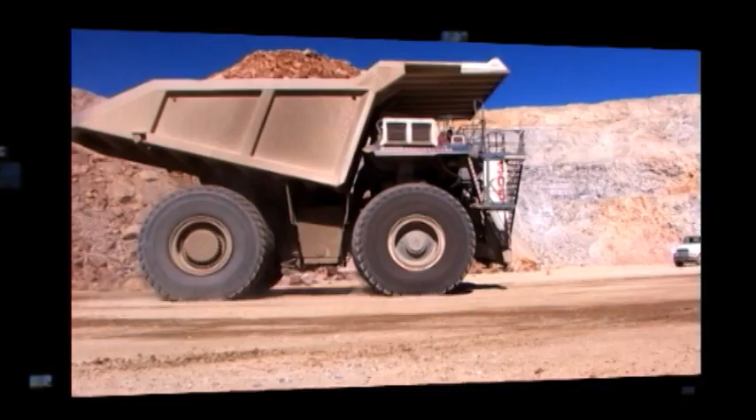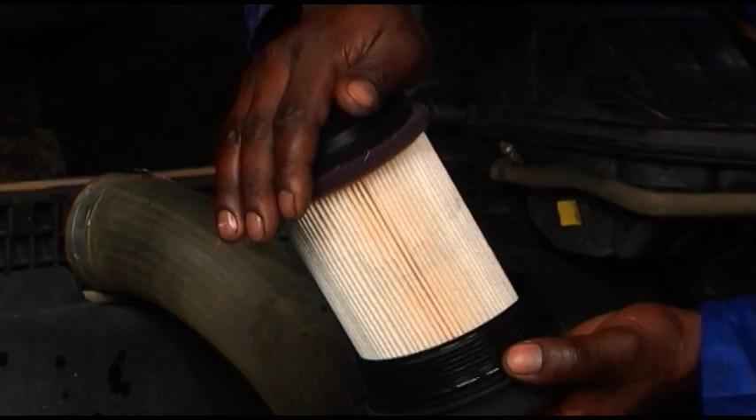Even in challenging work environments, consistent and reliable fuel system performance is possible. The key is good service practices. Before we look at the Donaldson Company's step-by-step fuel filtration service guidelines, here are the pictograms which are printed on Donaldson fuel filters. Do not use tools.

Remember that tools can dent filter housings. Also, do not use spin-on filters with dented housings. Clean the filter base. Lubricate the gasket. Hand tighten. Fill with fuel, remembering to fill the fuel filter with clean fuel on the dirty side of the filter. Don't make the mistake of pouring dirty fuel down the filter center tube.

Complete filter tightening to the number of turns designated on the filter icons. Open fuel filter water separator valve, drain, and close. This one indicates a twist and drain fuel filter water separator. These recycling pictograms indicate the importance of proper disposal. Follow your regional guidelines or laws regulating disposal of filters.

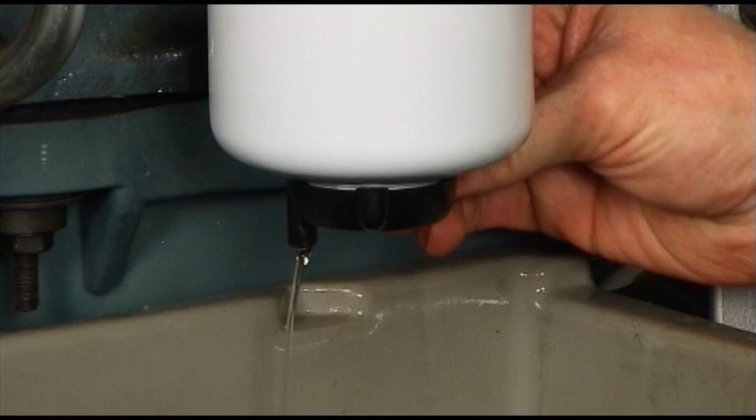When changing fuel filters, use a clean cloth. To avoid fuel contamination, make sure the fuel to be used during filter installation is clean and that it has been stored in a container protected with a cap or lid. Before installation, if it's a fuel filter water separator with drain, drain the old filter. Unscrew and remove the old filter.

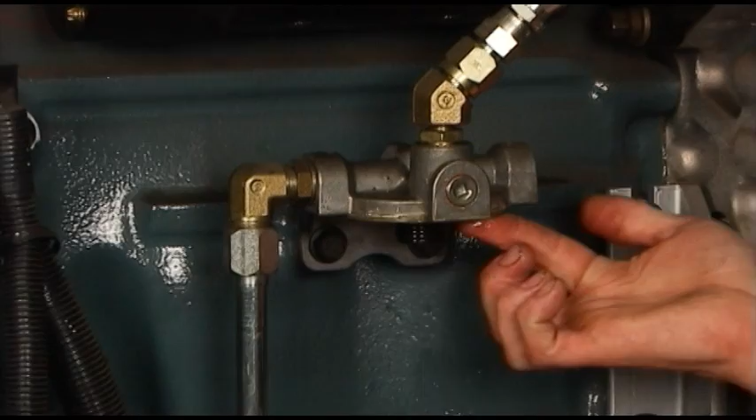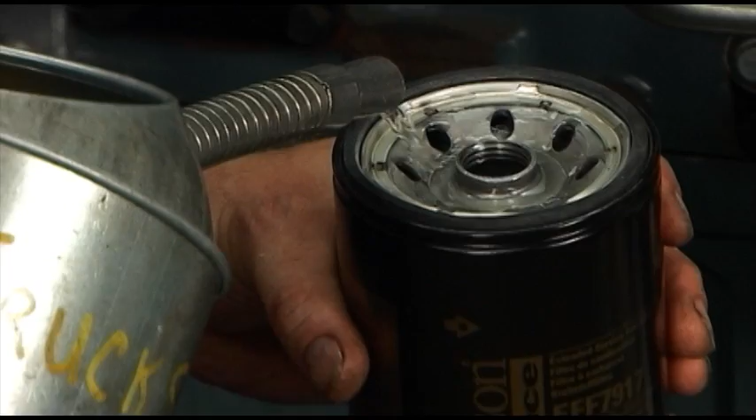Remove the old filter gasket if still attached to the base. Remove the old thread seal gasket if one is present. Wipe the filter mounting base or head with a clean cloth. To install a new spin-on, ensure that the new filter is not damaged. Then follow these steps. If the manufacturer recommends, fill the new filter with clean fuel on the dirty side of the filter. Apply a thin film of clean motor oil to the new filter gasket.

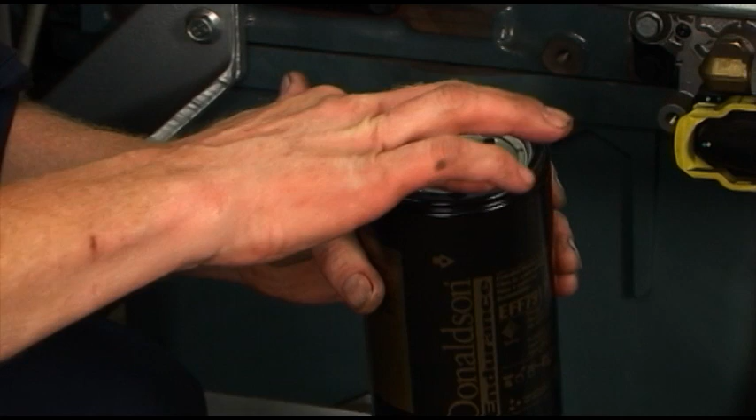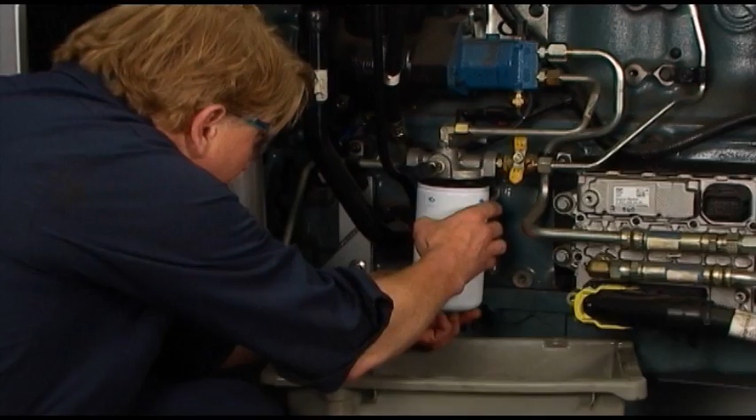Do not use grease. Also be sure never to use fuel to lubricate the gasket. Fuel isn't as lubricating as oil. Install a new thread seal if your system requires one. Align the filter threads to the mounting base or head and spin the new filter on until the gasket contacts the base. Follow the instructions on the filter pictogram for final tightening torque specification. Do not use a filter wrench to tighten.

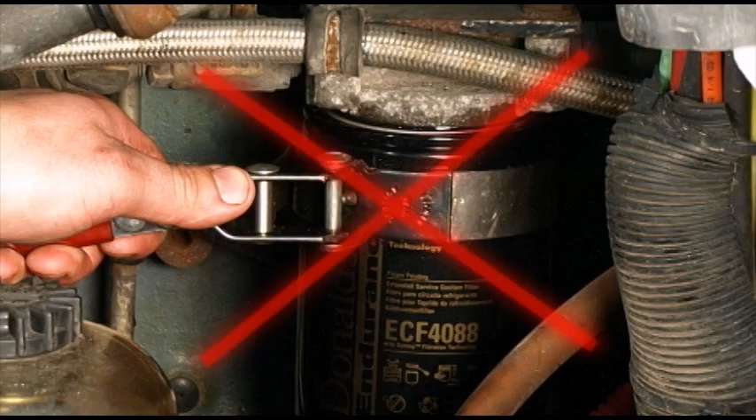Hand tighten only. Prime the fuel system by following the system priming instructions to remove all air from the fuel system. This is to minimize the starting time required after the filter change. After installation, start the engine and check for leaks, and correct the source of leaks if any are observed. In assemblies with bowls, make sure you replace the bowl gasket too.

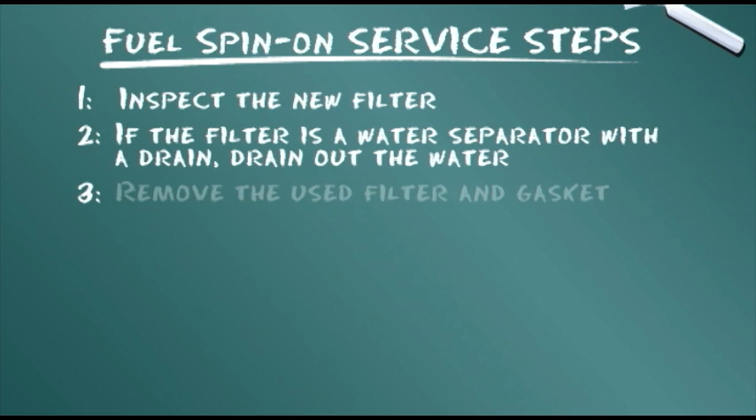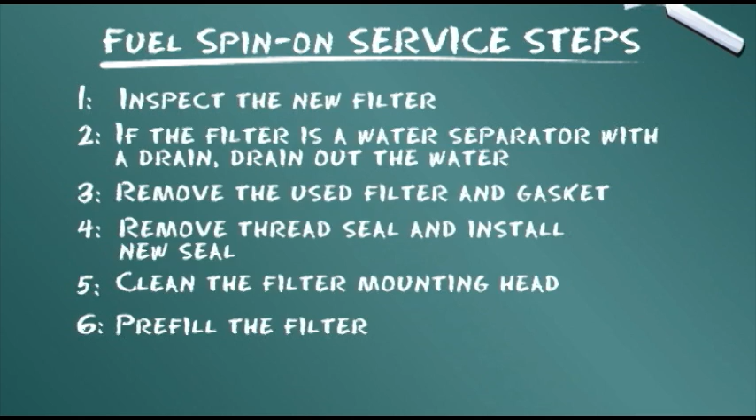Let's summarize the service steps presented. Inspect the new filter. If the filter is a water separator with a drain, drain out the water. Remove the used filter and gasket. Remove thread seal and install new seal. Clean the filter mounting head. Pre-fill the filter. Lubricate the filter gasket.

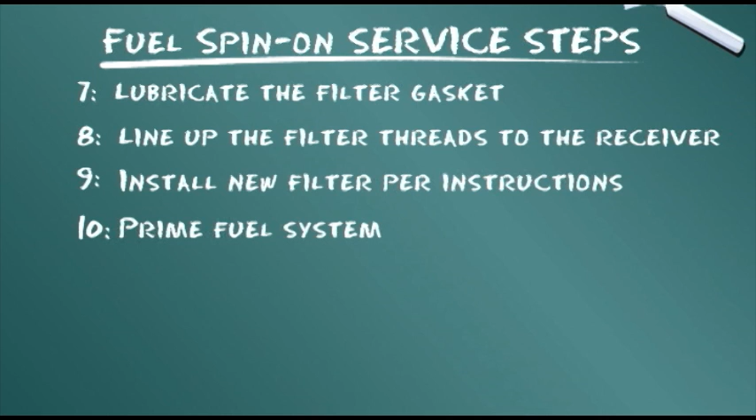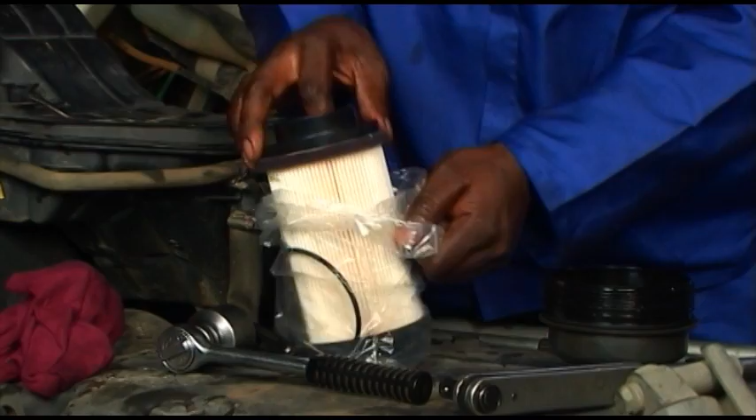Line up the filter threads to the receiver. Install new filter per instructions. Prime fuel system. Start engine and check for leaks. For filters with bowls, ensure that you replace the bowl gasket as well. Now we turn to cartridge filter change-out steps. There are several types of cartridge filters and housings.

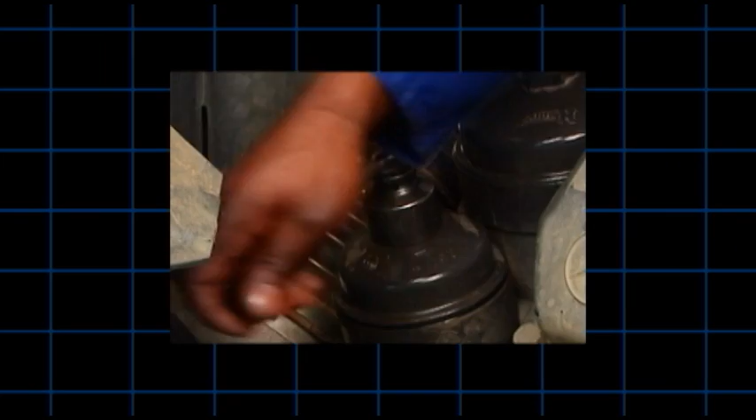First, for metal-free cartridge filter change-out, follow these steps. Loosen the cap slowly. By starting to unscrew the cap, a valve will open and allow the fuel to flow out of the housing. Then remove the cap and cartridge or element assembly. Remove the gasket from the base if one is present. The cartridge should be attached to the cap when it is removed. Unsnap the cartridge from the cap and dispose in accordance with local disposal guidelines.

Remove the old O-ring from the cap. Clean the cap and housing with a clean cloth. To install, fit the new gasket or O-ring in the cap. Place the new filter cartridge into the cap and install a new gasket on the base if one is required. Reinstall the cap with the filter cartridge and tighten the cap to proper torque per cap instructions if present, or

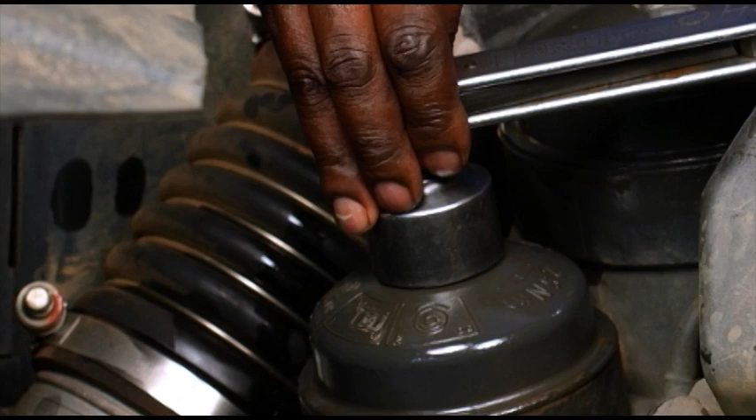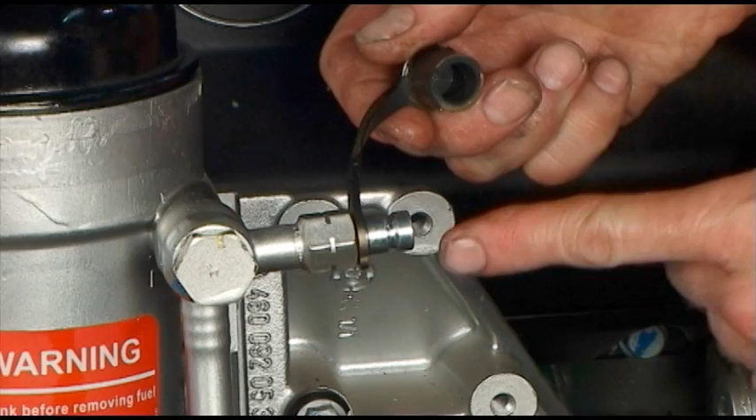follow manufacturer's guidelines. Prime the fuel system by following system priming instructions to remove all air from the fuel system. This will minimize starting time required after the filter change. After installation, start the engine and check for leaks.

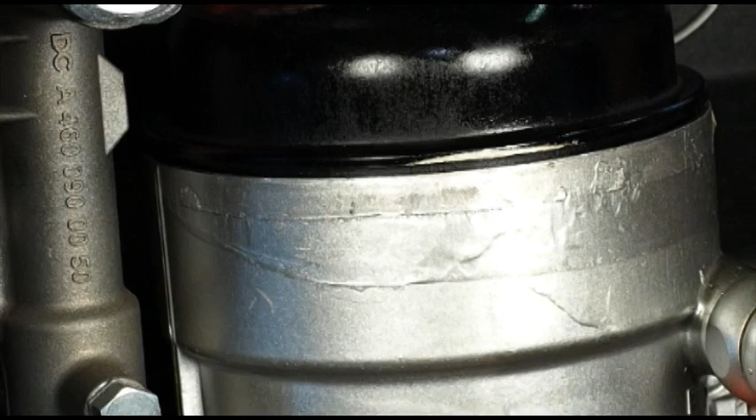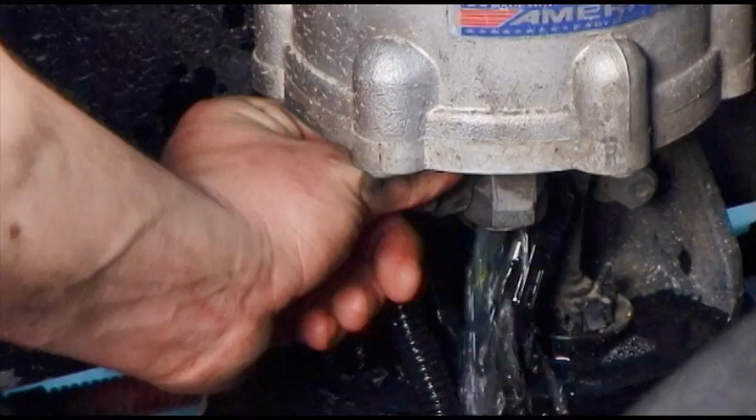For Davco-type cartridge filters, follow these steps. Remove the vent cap and open the drain valve to drain the fuel below the collar level. Remove the cover and collar.

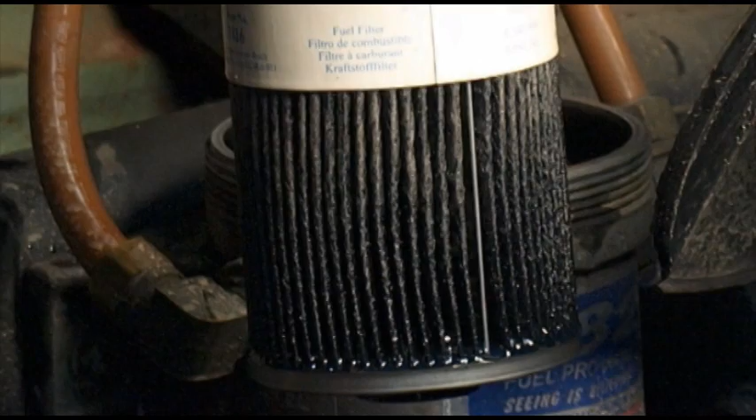Remove the filter cartridge, cover seal, and vent cap seal and dispose of them properly. If the grommet from the base of the cartridge has detached itself and remains behind on the stud, remove and dispose of it. Using a clean rag, clean the cover, the collar, and threads on the fuel processor body.

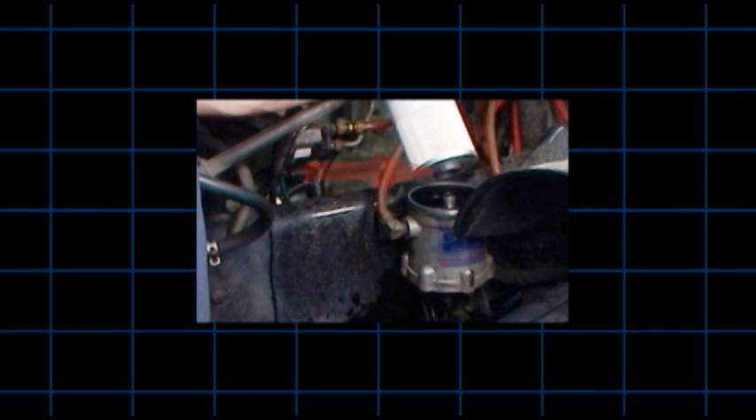Check to verify that the grommet is in place on the bottom of the filter cartridge and install the new cartridge. Install the cover seal, then install the cover and collar. Hand tighten the collar. Fill the cover with fuel. Fit the new vent cap seal onto the vent cap and hand tighten the vent cap in place.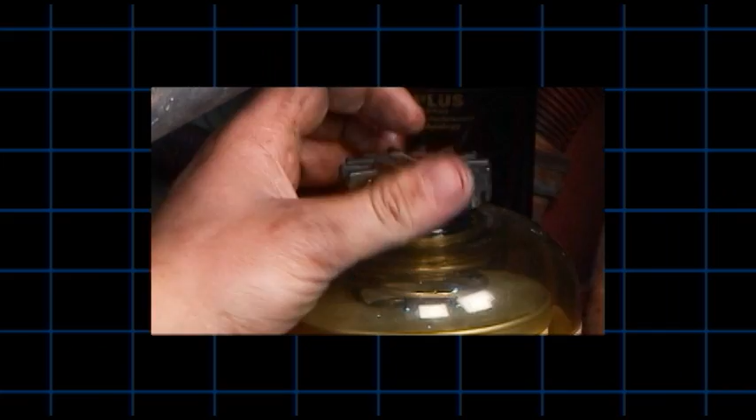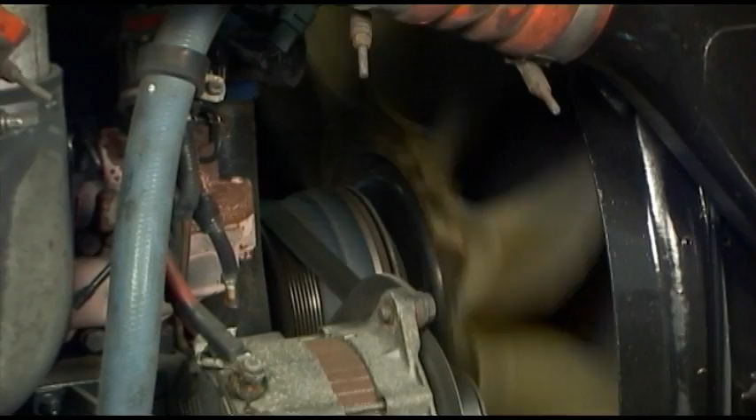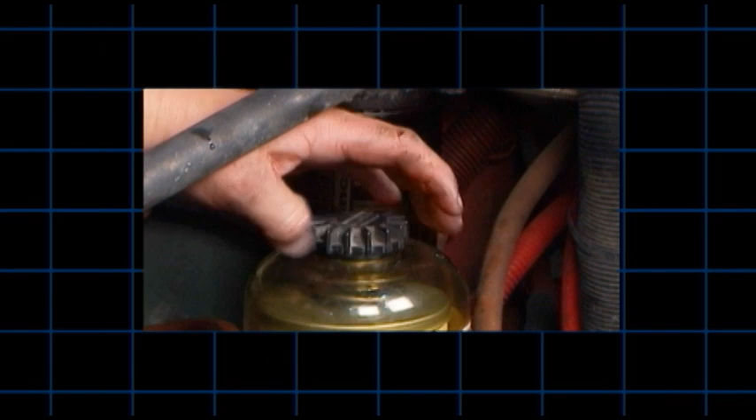Start the engine. When the lubrication system reaches normal operating pressure, increase the engine RPM for 1 minute. Slowly open the vent cap until the fuel level reaches 1 inch or 25 millimeters above the collar. As a final step, hand tighten the vent cap.

Let's summarize the service steps presented. Drain fuel, water, and dirt from the canister and close the drain. Loosen the cap slowly. Remove the used filter and gasket. Clean the housing seal area and cap. Install and lubricate O-rings, gaskets, and housing seals. Install new filter per instructions. Prime fuel system. Start engine and check for leaks.

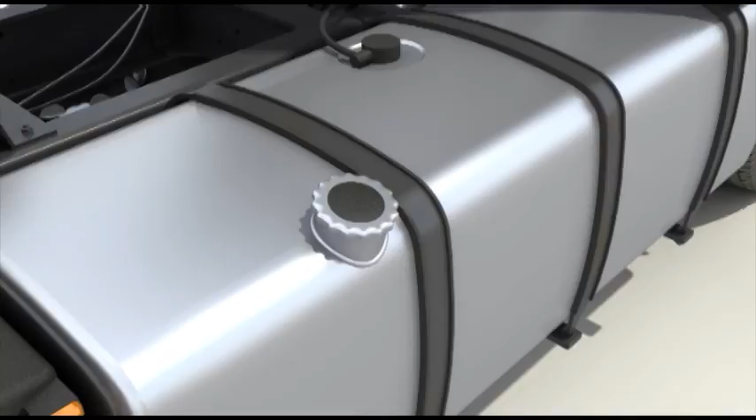Now, here are a few fuel system tips. What advice is there for avoiding engine performance problems related to impurities in fuel? Drain water from your primary filter daily when refueling. Carry a spare set of fuel filters in case you receive a bad load of fuel.

Remember that if the filter becomes clogged, it's doing its job in catching harmful contaminants that could lead to more expensive repairs. Never switch to less effective filters to get longer filter life. This will reduce fuel pump and injector life.

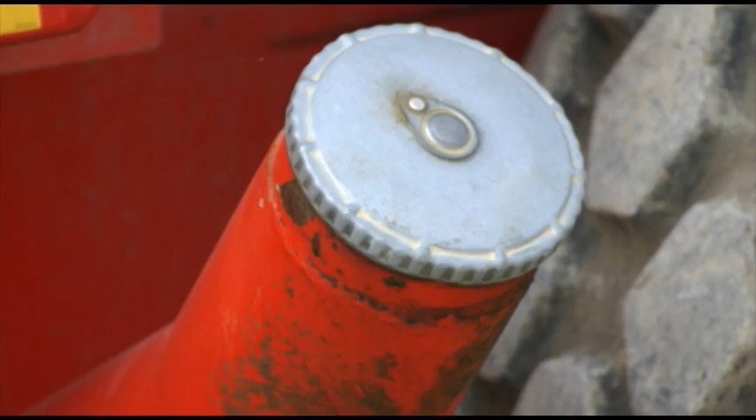When using your own fuel storage tank, remember that removing contaminants before they reach the vehicle is the first part of the best practices process. So ensure you have effective bulk storage tank filtration. Ask your Donaldson dealer about bulk fuel filtration.

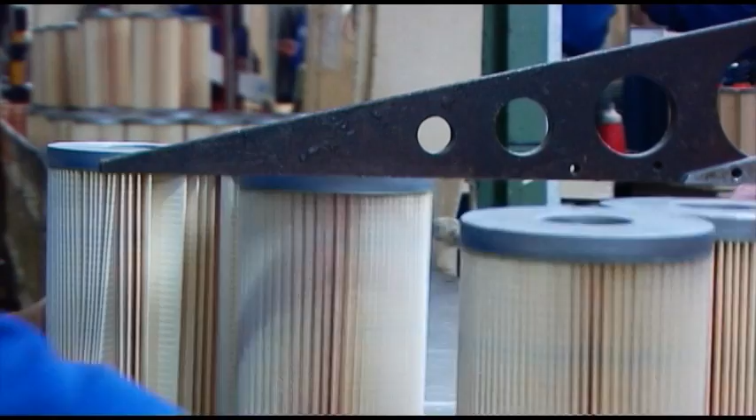If using biodiesel, make certain your fuel supplier meets current fuel standards. Ensure that your engine is compatible with the concentration or percentage biodiesel you wish to use. Note that if you intend to change from ordinary diesel fuel to biodiesel, you need to be aware of biodiesel's possible effects. The engine deposits that are released when you switch to biodiesel can clog the filters. If you plan to switch fuels, cleaning your system before making the switch to biodiesel will help prevent or minimize additional maintenance expense.

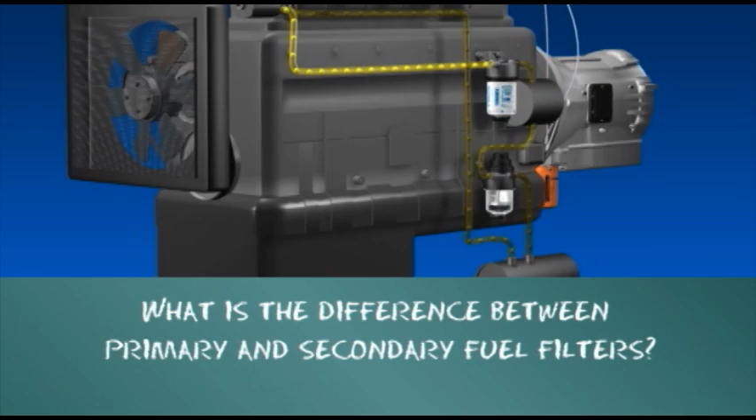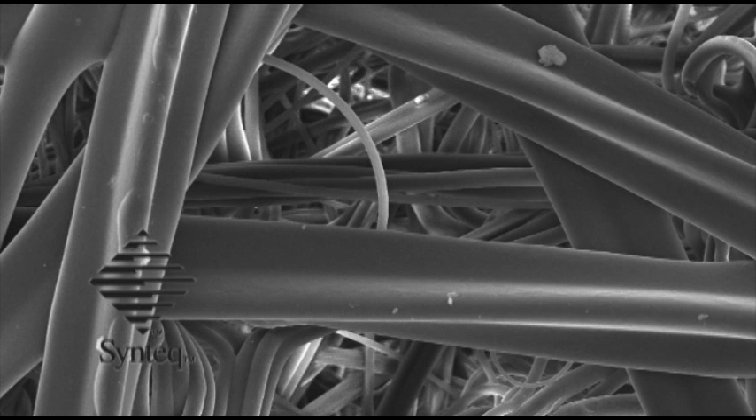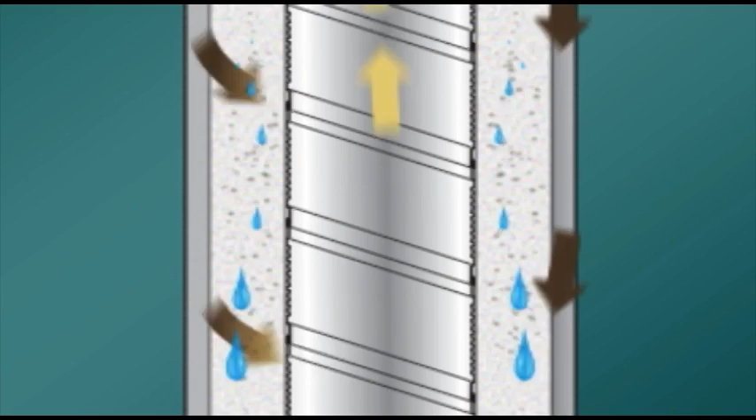What is the difference between primary and secondary fuel filters? Generally, primary filters are used to separate water and larger particles, a 10 to 50 micron efficiency, while secondary filters are for final filtration, less than 3 to 15 micron efficiency. Primary filters frequently have treated media, such as Donaldson Synteq media, to provide water separation performance. Secondary filters are usually an untreated cellulose or purely synthetic media. These differences mainly have to do with the water separation requirements placed on primary fuel filters.

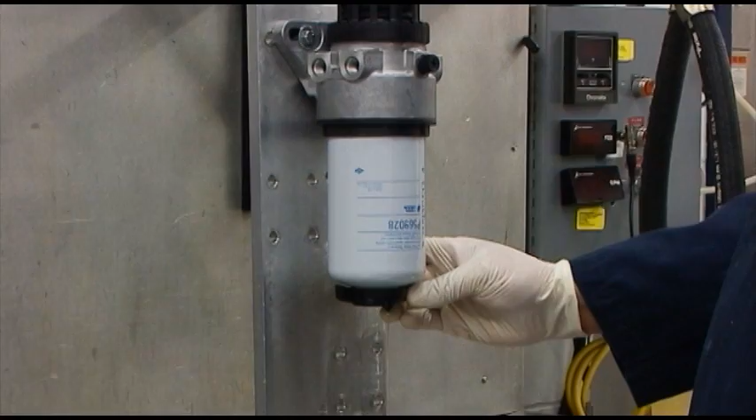Do all primary fuel filters have a drain? Most primary fuel filters have drains that allow the operator to drain the water that has been separated by the filter. It is also recommended that you pay attention to how much water is removed at each drain and adjust your drain frequency accordingly.

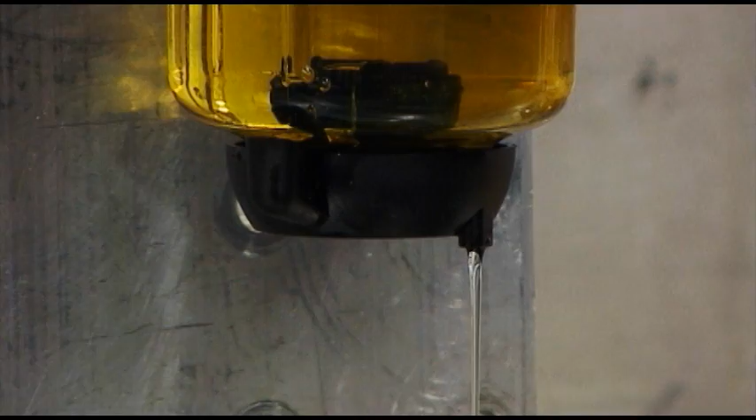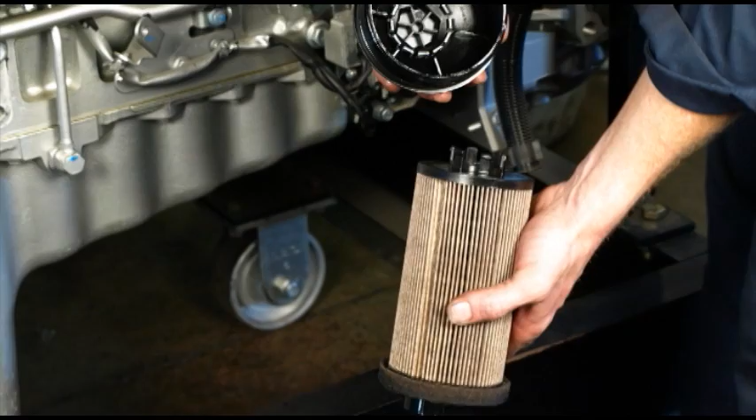How do you ensure that a replacement fuel filter has the correct micron rating for the technology used in a particular engine and injection system? When replacing your fuel filter, ensure that you use the specific recommended replacement or a direct cross-match from a reputable filter manufacturer you trust.

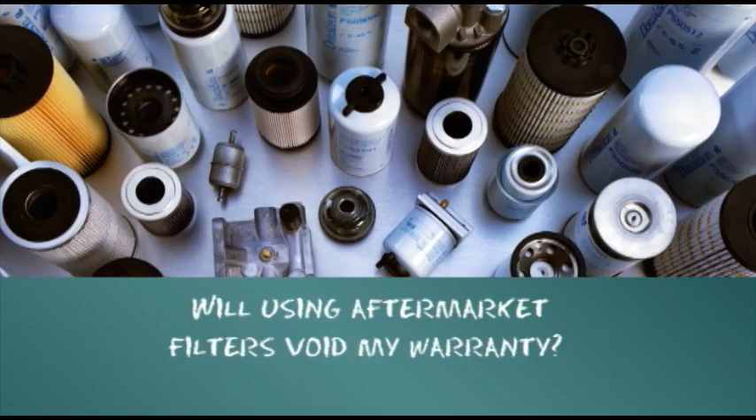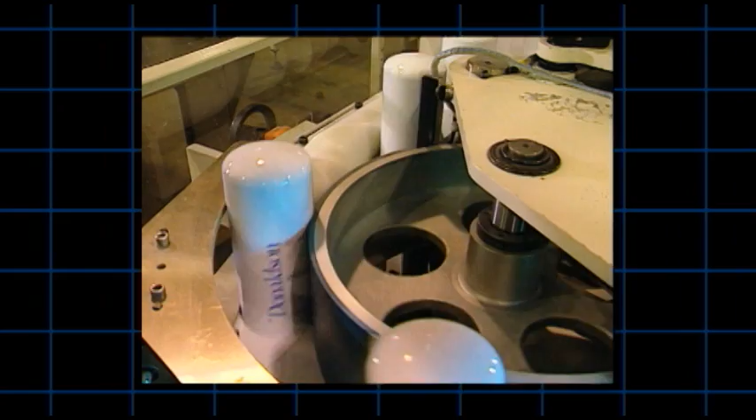Will using aftermarket filters void my warranty? Equipment manufacturer warranties remain in effect when using Donaldson filters. In the event equipment is damaged as a result of the use of a Donaldson filter, then the Donaldson warranty will apply.

This servicing information is provided as a best practices guide. It is not, however, intended to replace or supersede the service instructions supplied by your engine or vehicle manufacturer.